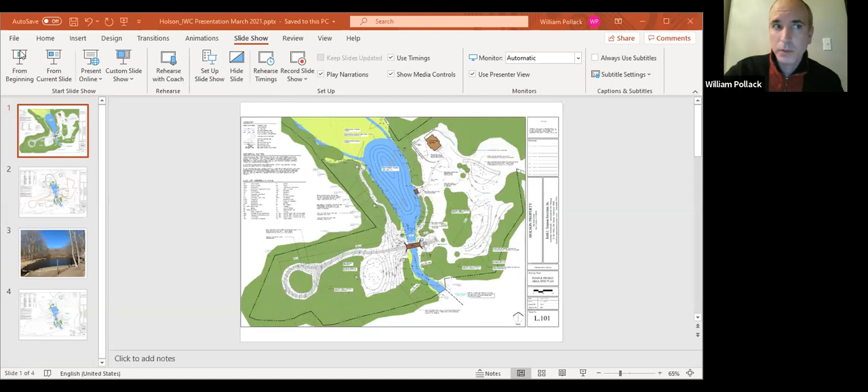Thank you, Keith. It's Bill Pollack, landscape architect with Keith Simpson's office. Kathleen, if I can share my screen, I'll show some graphics. Let me look into how to do that—it looks like it's working on my end, if you can all see it. Yep, we're good.

This is the original permitted project from 2019. It shows a 1.2 acre pond. I'll try to point out things with my mouse cursor—the bridge is basically centrally located on the screen as a reference point, shown in brown. The river runs through it in blue, and the pond that was originally proposed is shown up to the north side there.

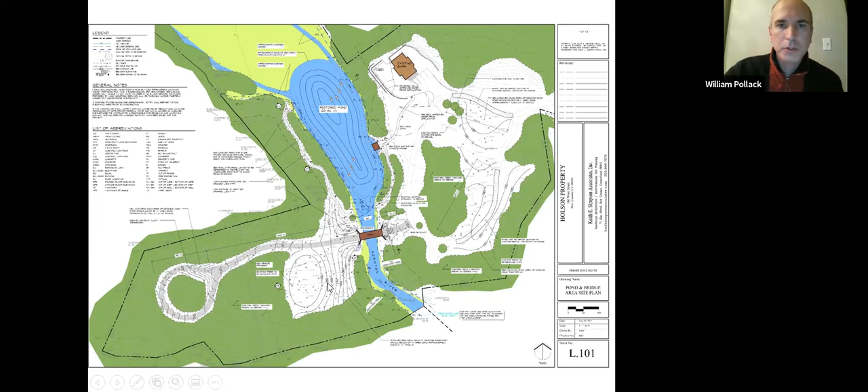The modified approval that Keith spoke about basically went to roughly where the dock is shown, about a quarter or so of the pond—I'll have another graphic to get into that more. The green area represents wooded areas that were to remain or other areas that may have been cleared. This plan also shows the extent of disturbance that was proposed at that time.

Again, the bridge is shown roughly through the middle of the slide in brown. The blue you see now is approximately the surface water, including the pond and river in the area of work. This red dashed line represents the area proposed to be disturbed originally. The blue line near the top was the 1.2 acre proposed edge of pond. In the center, near the dock, another dashed blue line was the proposed modification from 2020 that was approved at that time, showing the size of the pond roughly. You can see it extends further to the north, as Keith explained.

This last slide is a cleaner version of the proposed mitigation efforts. The blue you see is the current configuration of the pond. On the northern end, there is some additional surface water that extends a little further—it's very shallow, and that will be taken over by emergent vegetation. We are planting that edge pretty heavily, where the seed has come up, with shrub plantings and other emergent vegetation consistent with the riverine system.

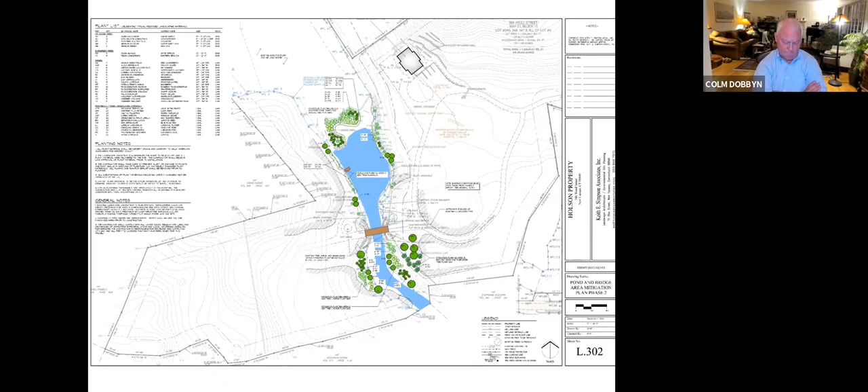Thank you. Bill, this is Peggy Kirby. I have a couple questions. Which contractor did the disturbance? Was it someone dredging the pond or was it somebody else?

Yeah, it was the contracting team that was working on the pond. So it was the people that were dredging the pond. Yes, that's correct. Okay, and so why were they clearing that far up for dredging the pond?

Well, I think it's probably best to ask him directly. Mr. Nazzaro is here, and his equipment was doing the actual excavation, and I think he was using judgment at that time. But I don't want to put words in his mouth. Maybe Gene, you could weigh in and answer on that.

Absolutely. My name is Gene Nazzaro. We do the extensive work for Mr. Holson and pond work in New Canaan. When we were excavating this area, let me get my cursor, here we go. I do have it. Tremendous.

We have two areas of flow coming into the pond, one on the east side, one on the west side over here. And primarily the greatest flow came from the west side in here. In this area, starting from this point all through here, in this general area, there's an extensive amount of sediment in there.

There's at least 4 feet of muck, just organic material that had accumulated in there. Not only did it accumulate here, the water found its way going to the west and to the east, creating basically a big island, or moraine of sediment, in here.

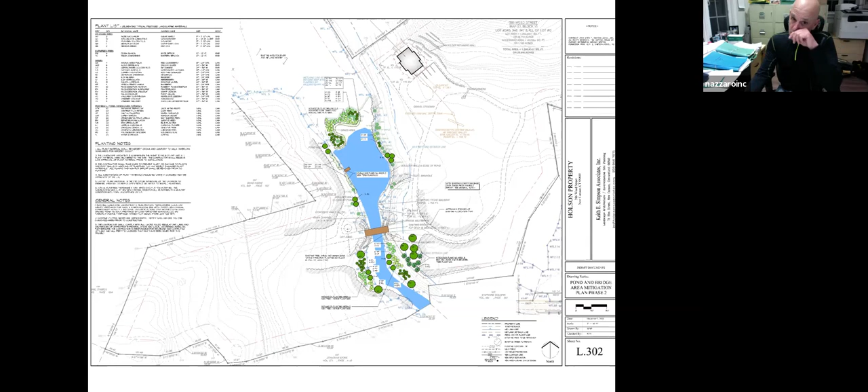We're digging this area out. Because of the amount of mud that was in here, the embankment started to slide. As we deepen the pond, the original intent of all of this, going back to what Keith and Bill had said, was to generate enough material for the backfill of the head walls, the wing walls, and the approach to the bridge and exiting the bridge.

This is actually the greater fill area in here that occurred, where this wing wall is. We're excavating this area out. This mud began to start walking, sliding in, if you will. Below that layer of mud, we had approximately, I'd say anywhere from 6 to 14 inches, of gravelly material. We said, great, we can shape this up and leave it where it is.

Below that one thin layer of gravel, there was another woody mass of sediment and old debris, sticks and decayed tree matter. We actually left that in there, trying to shape this to stabilize it to get a 3-to-1, 2-to-1 slope.

Typically, when we dredge something out, the sides will walk in, much like if you're at a beach digging down in the sand, you find some water and the sides fall in. Same thing sloughed in here. So in order to accomplish this, without having the benefit of hydraulic pressure to hold the soils back, it kept walking.

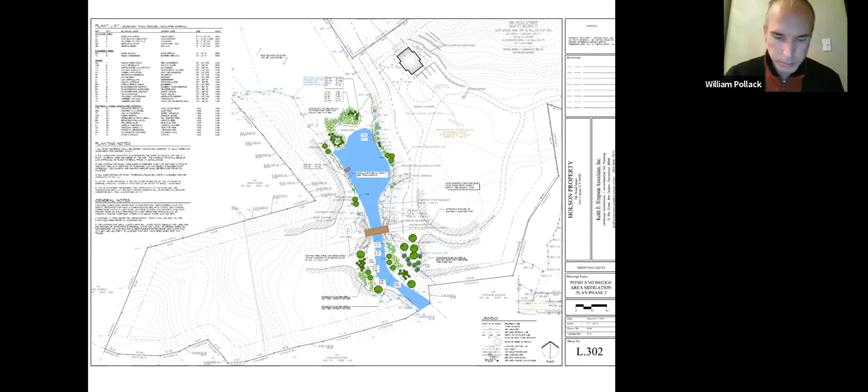Square footage wise, are you speaking of? Yes, and I'm not just talking about the edge of the water, I'm talking about the area that was pulled up too. About how large is that? It's about, I would say, about a tenth to a fifth of an acre. You know, about 0.1 to 0.2 acres. So that's only about 4,000 square feet. Okay, thank you.

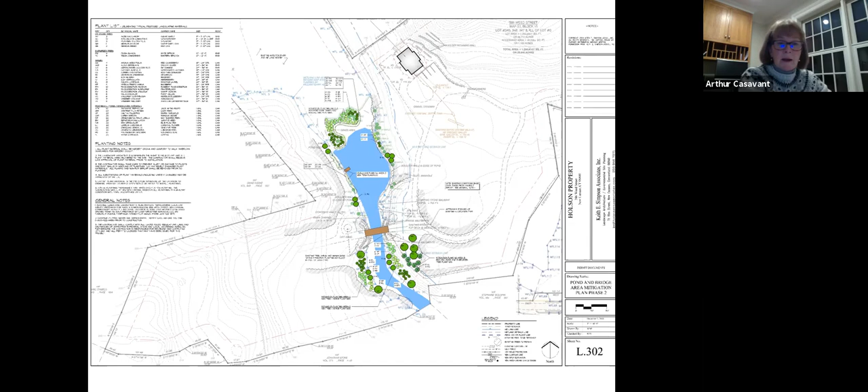I've just got a couple of follow-on questions here. Mr. Nazzaro, at what stage were you aware that what you were doing as far as the dredging was concerned actually went well beyond what had been approved in the application? And why didn't you just stop and say, this isn't working, we need to do something different, and get in touch with the director of Inland Wetlands, Kathleen Holland?

Well, we started excavation at this area, working our way back up. This was the last section of it. We commenced our activity here, working our way up. As we got into this area, that's when the soils became different. In here, it was really good, hard river bottom. When you had the accumulated sediment up in this area, that's where the difficulty began. Time was of the essence when you're working with something like this.

Yeah, but can I come back to my question? At what point did you become aware that you were going beyond what was permitted, and what was your reaction then? Well, to be honest with you, I wasn't looking to go beyond what was permitted at all.

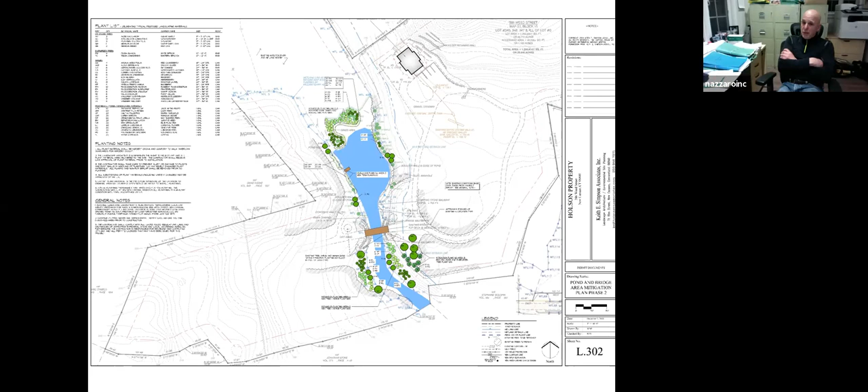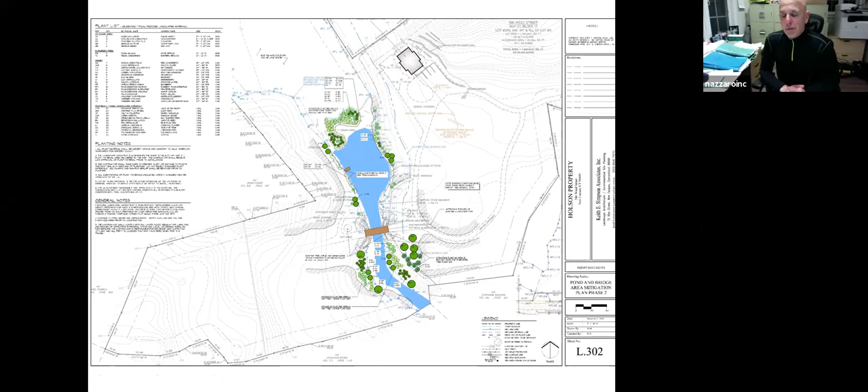Yes, at that point this should have been brought to Kathleen's attention. This is George Perkins. It looks like you were working under some pressure there. Is the area now stabilized and will you have any problems like this in the future? With this pond or any pond? I'm trying to answer - my question is, is the area stabilized now? Yes, it's stabilized now. The ground is stabilized. The water pressure holds it back. There are no further problems with it. In my estimation, professional opinion, it's fine.

Could I turn to Mr. Keating? I want to ask you the same question I asked Mr. Nazzaro. You had a plan in front of you, you knew what was permitted, and yet you and the contractor went beyond in terms of the clearing. Why weren't you looking at the plan?

This is Sean Keating. I'm from TLC Lawn and Landscaping Service, and I've worked for Mr. and Mrs. Holson for over 20 years. Since they purchased the property on Weed Street, my role has been primarily to clarify - assisting in the designing and installing of the gardens, and assisting in the design and construction of the house and the accessory buildings.

And currently I supervise maintenance on the property as well as coordination of projects, and I manage all of the farm operations. This property is an active farm.

As Gene said, and it happened very quickly when he mentioned it so you might not have caught it, this extra bit of work on the north end of the dredging really just happened in two days. It was the very last part. Gene's excavators worked quite quickly.

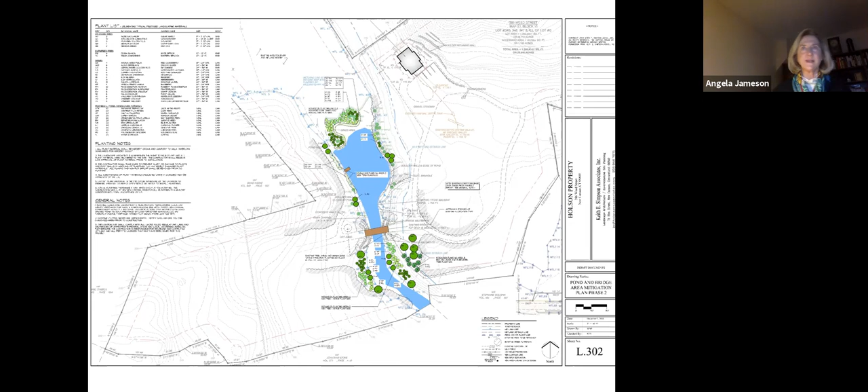So, it's good to hear the story. There are two stories here, the over-dredging and then the over-clearing. But I personally wouldn't want to minimize the consequences of over-clearing that area.

No, you're absolutely correct, and I don't mean to minimize it in any shape or form. Mistakes were definitely made in that regard. In the scope of the previous application, which would have meant all of that section was underwater anyway, I don't think there is any lasting damage. It is our effort, and we've put a lot of time in, Keith's team, Gene, myself, Mr. Holson. We really want to get back on that circle of trust because it's very important to us. We're members of the community here, and the Holsons are particularly anxious, they purchased this property because they're so interested in the land and in conserving the area, not seeing it developed, and that really is of paramount importance.

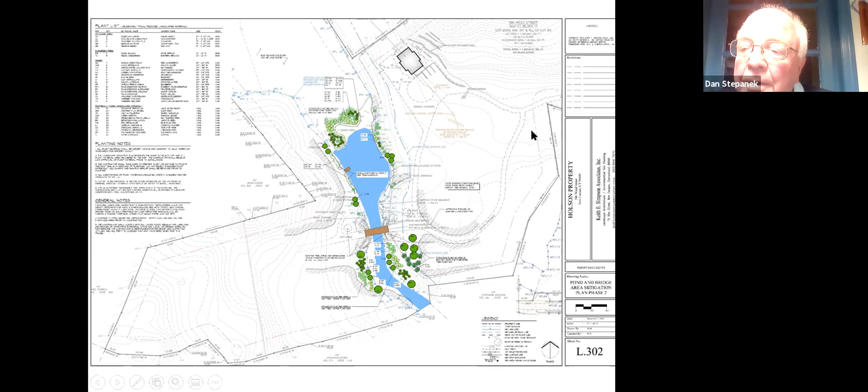Sean, hello? Go ahead, I think you're calling on me. Penny, go ahead. Okay, I just wonder, Sean. Who's got that feedback? Well, I don't know.

Okay, I just want to know from Sean, when you mentioned lopping and pruning and that those plants would grow back, what kind of plants are they?

I think, am I muted? No, no, you're not. Am I? Can you hear me, Mr. Keating? Yes, we can. Okay, excellent.

So the growth that had come in there, this was all, we believe, 100 years or so, originally a pond, because the rock and so forth that Gene discovered in doing this shows that those banks had previously been a pond. So the plantings in the area that have grown in the silt as the pond eventually silted up, what has washed down and grown, are all native plants that have emerged and even started to make a recovery toward the end of the season. It's all kind of just natural vegetation that's come in.

I mean, desirable vegetation, or there are all sorts of invasive things around, so you don't know what it was?

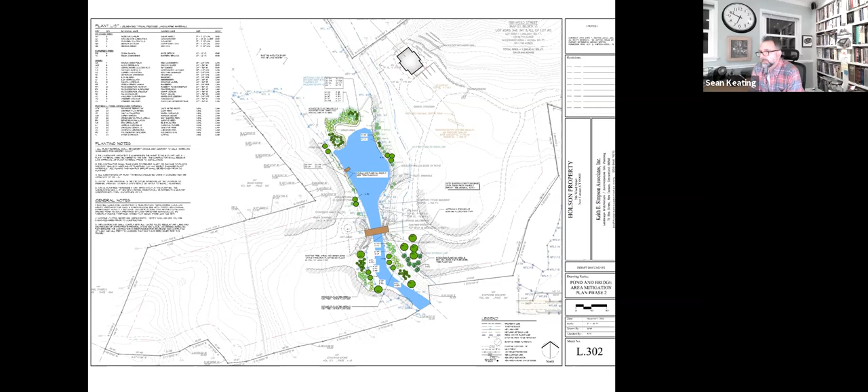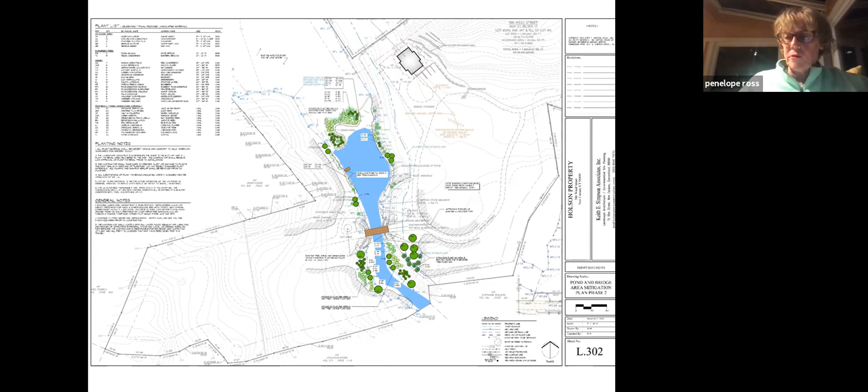Not specifically that particular area. I mean, I think you've been to the site, yes? Well, I went to the first site visit, which was 2 years ago, when the pond really didn't exist. So it was exactly that vegetation that you saw 2 years ago.

Okay, so Bill, or Mr. Simpson, can we scroll back just a minute and see what the original plan was? I wasn't on the board at the time. What was the original plan for the pond and how extensive was it supposed to be?

Is that blue line there that you guys are pointing out? Yes, where my cursor is now was the modified approval from last year. And the shaded blue is the configuration of the existing condition currently, right? But that blue line up top is where it was supposed to be? Correct, that was the original permitted 1.2 acre pond.

So you guys went for a modification after getting approved for the bigger pond, correct? Correct, smaller pond. And then the modified one was around a quarter of the size of the original, and what ended up being the size of the pond was close to a third of the size of the original.

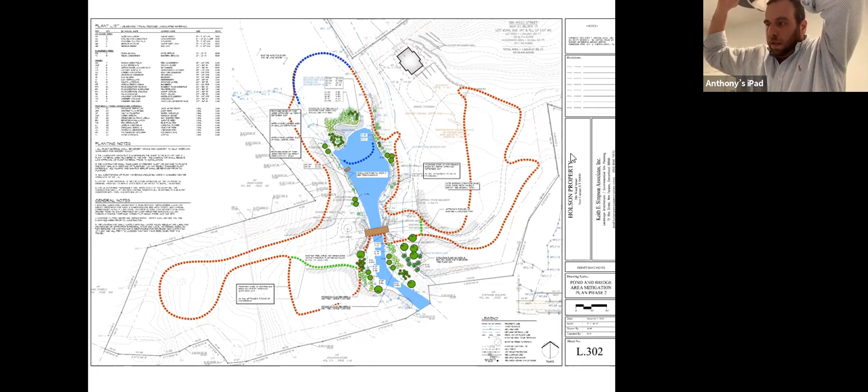And then someone went in there and used weed whackers and loppers to cut out some stuff that Mr. Nazzaro's excavators... when you have machinery, obviously it got disturbed a little bit, I'd imagine. Yeah, I think that's what happened. I also would add, I do believe the vegetation that was cut will certainly come back. As Sean mentioned, the root systems are intact, and they should come back pretty forcefully.

But nobody has said what the vegetation is. So is there a plan, Mr. Simpson? Do we have a laid out plan on what that vegetation would be? Is there something that you guys had proposed before, or documented what was there before, that we can say, hey, we're gonna replace what was existing?

Because I understand, as you know Mr. Simpson, I'm in the business, I've done a lot of excavation, and I understand machines get in the way and you need a little extra room, especially for these big pond dredging excavators. I just want to see if we're going to do something, which I imagine you guys would, that would replace anything that was disturbed.

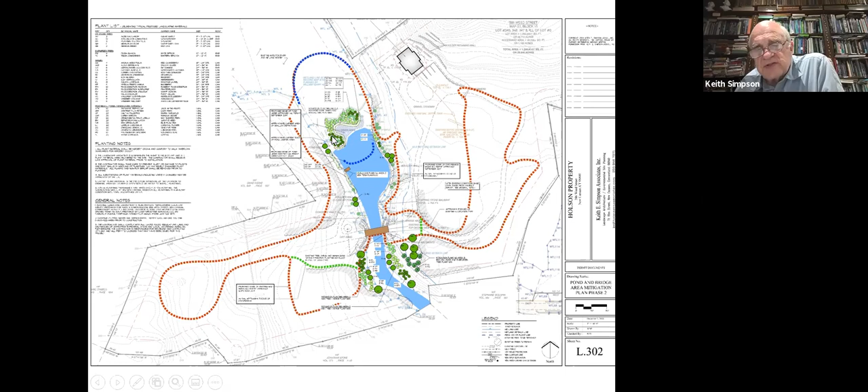Yes, we do know pretty much what vegetation was there, even though it's now been cut down to only probably 12 inches or so high. But it was typically winterberry and spice bush and all the ferns and plants we usually find occurring in a wetland system. The planting plan that we have is really pretty extensive, and Bill has that on the plan. The result will be a non-invasive plant palette for sure, but a much richer plant diversity there than was there before. So net it will be an improvement, an enhancement to the wetland in that area. That's the purpose of mitigation planting.

Mr. Simpson, obviously you've been doing this a very long time, but are you confident that those plants will stabilize? It doesn't seem like you know exactly what it's going to be yet, but it's going to stabilize the area nicely and make it what it's supposed to be.

Oh yeah, we have it well planted, and the advantage of planting in an area like that is there's no need to irrigate anything. Plant material in that kind of location tends to take off very well on its own. And even though it's been disturbed, it will take off on its own, you would imagine.

Because right now, I went to the site today, which is stunning. But I did go on that bridge and looked over, and it's just grass. I'm assuming it was disturbed. It looked like it was excavated and graded off. I mean, those plants that you'll be planting will take, I would imagine, even though it was probably graded and altered a little bit.

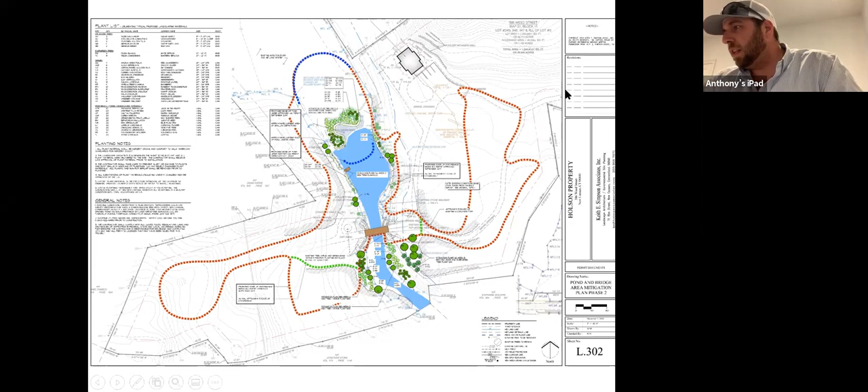So my question is, you exited from the grass area that we're talking about now? You exited from that area and went around, or? We exited from this general area—you can see my arrow, this dark arrow, in this general area. It was kind of the midpoint in the pond where you could work this side and this side, and this area here.

Keith came up with a drawing for that. This area was addressed first in relationship to the bridge and the conduit, and all that had to happen, working our way back up. That's how it went about.

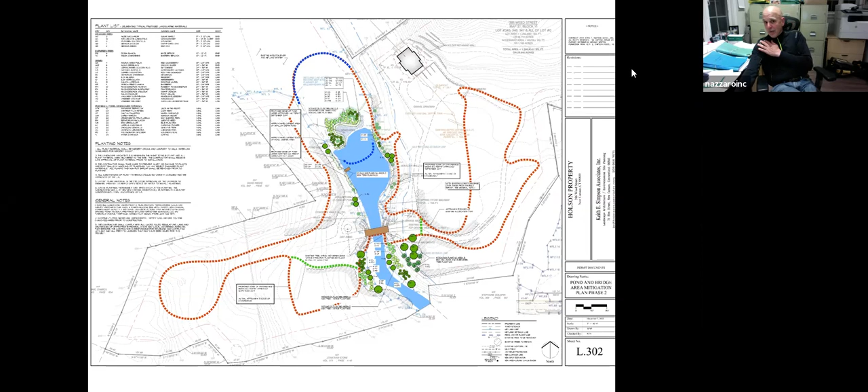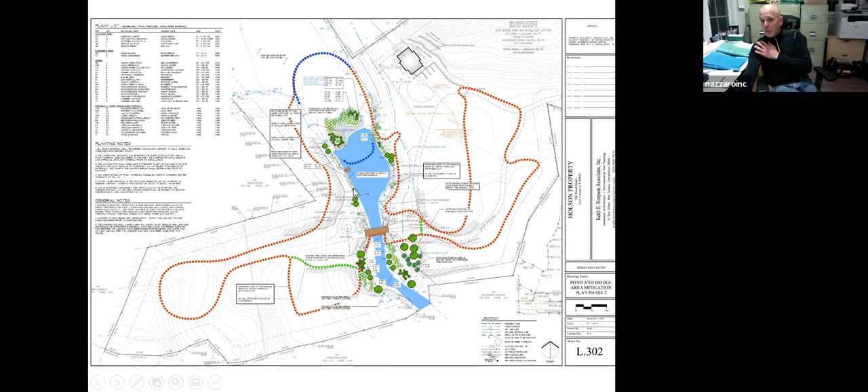We don't want to start at this end here and have all your sediment flow. Completely understood, I just wanted to see what side of the pond you were on with that long reach excavator, which it looks like you were right in front of the dock there. That's correct.

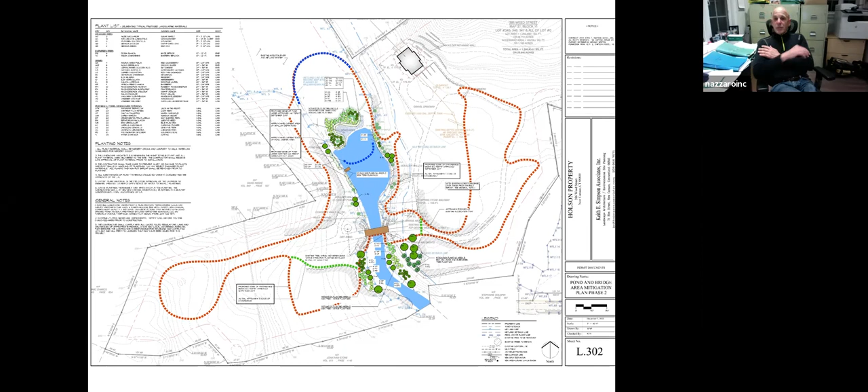And then you reach over to where we're talking about. We actually walked right inside the pond. Machine on timber mats. Okay, perfect, thank you.

Does anyone have any questions? I'm sorry, go ahead. Yes, this is Angela Jameson again.

We've talked at great length about two of the pieces here, the over dredging and the over clearing. I'd just like to touch on the third element, which is the fact that the dock ended up on the other side of the pond. So my first question, and I have another after this, is: has that caused any additional disturbance to the pond or the wetland, having it on the west rather than the east side?

No, I think I can answer that. It really hasn't. When I was shown the location where they were thinking about moving it to, I felt there was really no difference. It was positioned better in the pond than I'd originally shown it, because I was originally showing it in anticipation of a different shaped pond. So the move really had no adverse effect. I didn't feel it was of much consequence, quite honestly.

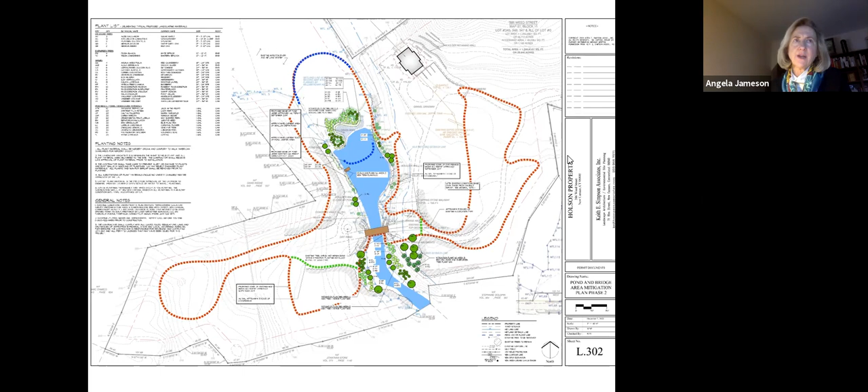Okay, so my second question is, I think some communication to Kathleen Holland would have been called for when there's a change like this. It may not be a big deal, but I think as the director of Wetlands she needs to hear about it and make that judgment call.

Oh, I think you're absolutely right, and the communication issue is something I, and I know Bill in my office, and all of us take seriously. We have a very trusting and open communication system with Kathleen, which we appreciate, and it works well. So to the extent that we didn't communicate at all the different points on this project, I apologize for my role in that. And we appreciate Kathleen's willingness to be responsive to site conditions as they develop.

If you don't have another question, if I could just follow up on the chairman's question. Mr. Chairman, you asked how long it took, and I looked it up: the dredging began at the end of June, went through July, and ended in early August.

And one other observation I'd like to make, looking at the drawing in front of us, there is a west stream which flows into the pond, and an east stream which flows into the pond. Those streams have varying degrees of velocity depending on the rainfall upstream from them.

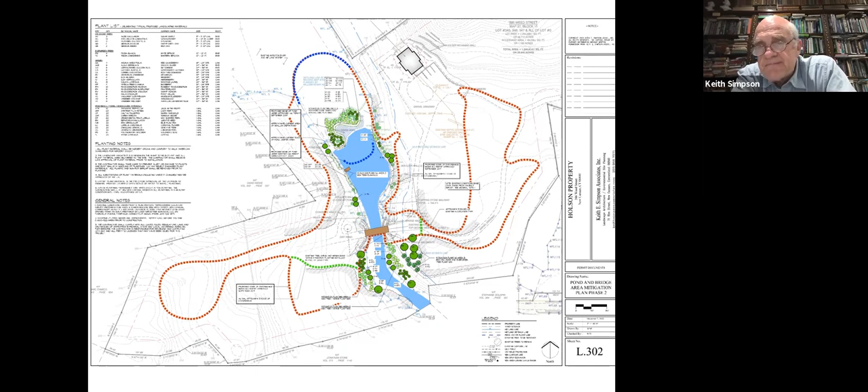I see. Anyone else have any questions about the pond? What about the plantings? Any more questions about the plantings?

Yeah, Dan, this is Colin. I was out there earlier today, and it is a beautiful piece of property. We've been out there multiple times over the years, and I'm glad to see from the plans that there's a significant number of trees and shrubs that are going to be added. I guess my question is, didn't the original plans call for plantings? I assume this is superseding it, but why was it not done until now? It's pretty bare, and given how long the project's been going on, I was surprised that there wasn't more planted.

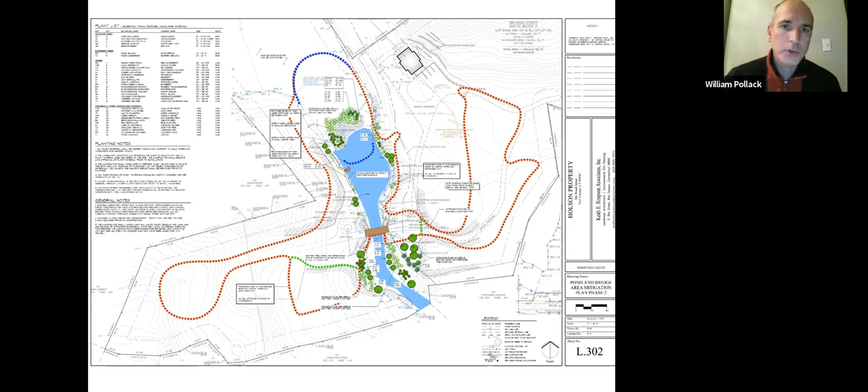I could answer that one. Some planting did go in. It's not as visible this time of year, but we did do a good amount of planting around the bridge, around the abutments, and around the boulder embankments in the areas of the bridge. There was slated to have more planting around the pond, just as you suggested, under the previous application and the previous modification. We held off on planting around the pond until we knew what the as-built survey was going to produce, and therefore this new plan supersedes the previous pond planting, with the notion that we did install quite a bit around the bridge area. Okay, thank you.

Kathleen? Kathleen, do you have any comments? No, just to summarize, I appreciate everyone's efforts providing a detailed explanation of the series of events that led us to tonight.

I do not remember who said it, but the project went along literally 90% seamless. Everything was spot on, from the bridge to the pond dredging to the soil and erosion controls. Inspections during COVID were being made by myself and others, and occasionally I would meet up with Gene or his son Ross while they were doing the dredging, and truly everything was going so very well. It was a very large, comprehensive project with multiple things going on, as Keith said.

And I'm appreciative of the explanation and the issues that Gene Nazzaro ran into. I wish I had been knowledgeable of it at the time, but it literally does sound like it happened in a 2-day period of time. And then upon going out for further inspections, things looked off to me. So that's when we reset our gears and took a hard look at the current situation, and I felt the need to bring the commission up to speed tonight.

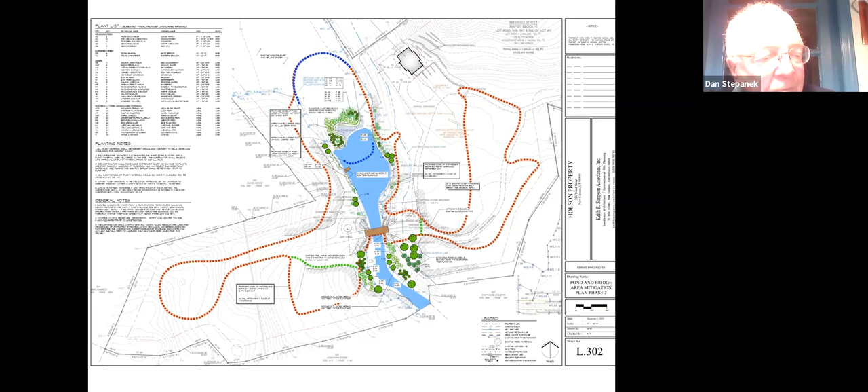Kathleen, just to confirm, you've looked at the mitigation plantings and signed off on it. You believe it's adequate and appropriate for the property. I have reviewed Keith's report, which was very thorough, and I appreciate the time and effort that went into the plan. The plantings, numbers, types and sizes, I truly defer to Keith and his team on what's appropriate for that location. It does seem quite sufficient as far as preventing erosion and establishing themselves long-term in that area. So to the extent that I've signed off, yes, I don't see any issues with the application that's been provided. And now it's up to the commission to also find the same conclusion.

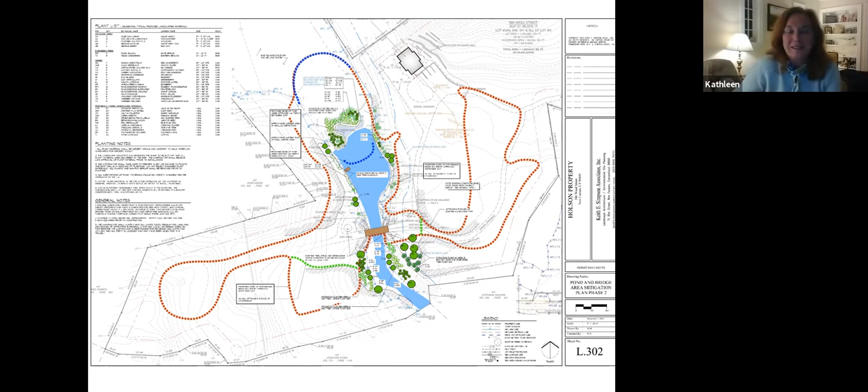Thank you. Will the plantings be done this summer? Is that what the intention is right now? Yes, Mr. Chairman, I would say we would like to get on with the planting promptly this spring. The earlier we get planting in the ground, the higher the rate of survival it has. So there's a certain amount of lead time of a few weeks, but not very long. I think the sooner we could do it, the better. We would hope within a month or two we may be able to show Kathleen the result of it all.

Well, let me ask you this. Who is the point person now on this? Is it you, Keith? I guess it always has been. I want to make sure that we can rely on you to communicate whatever needs to be done and that type of thing. Because I really feel that it's the communications that faltered in this whole thing. I just want to make sure we're up to date on everything that is happening here, because it's such a beautiful place, and we'd like to stay involved, quite frankly.

Well, yes, I think, Mr. Chairman, I can say that I'd definitely be involved, as well as Bill in my office, in the more detailed aspects of the finalization of this. Before, we were really in more of an observatory role, just to check and make sure things weren't happening downstream or adversely affecting the wetlands. But with this component, we'll stay, with Mr. Holson's concurrence, on close track of what occurs. It'll probably happen fairly quickly. We'll be able to report on progress, tell Kathleen when it's starting, tell her when it's finished, and have the appropriate inspections. But yes, I expect to be very closely associated with this concluding portion of it. Yes, this is Todd, we want Keith and Bill involved at least until the closure of the permit and everything's done and signed off on. Good, thank you.